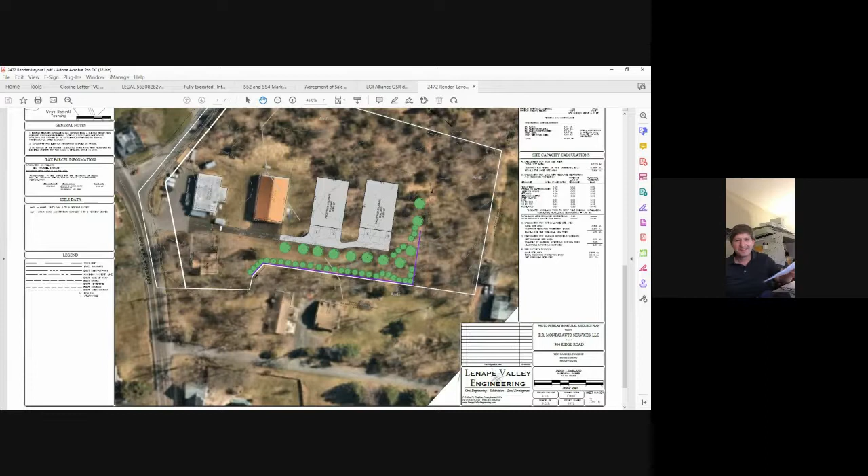Yeah, I realize that. How many of these do you do? Too many, but I make the same mistake every time, so I'm not learning. I was too interested in trying to get my ordinance up. That was the problem.

Yeah, I don't have much to add. They are providing the fence and the arborvitaes, which is in addition to what would be required. Now, it's not along the whole property line, but it is significantly along the part of the property where there's proposed development.

So I guess it would be, just what are the feelings of the planning commission on that extra buffering? Yeah, I mean, I support the effort there for sure.

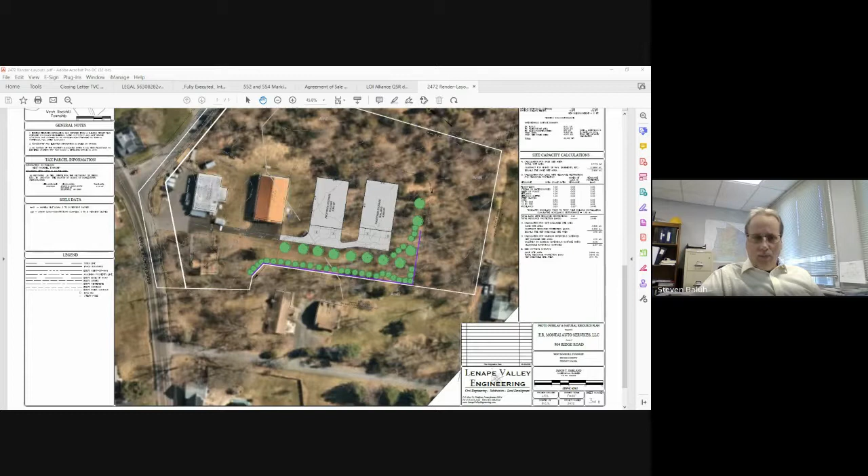And as you can see, it wrapped around the back too. Correct me if I'm wrong, Jason, but the fence will extend partially around the corner. The fence is the blue line on this plan. You can see it now — that's correct, it's kind of a purple line there. It makes a 90-degree bend and goes parallel to the backs of the building. That way, even if you can see through the trees that are remaining, it's still providing some buffering, but not along the property line where the trees already are. It just seemed to make more sense to buffer it closer to the building itself.

Is there any woodland between your fence and the dwelling you're trying to protect there? It's hard to tell from the aerial. There are some scattered trees through there. Okay.

Yeah, we've got a 30-inch maple, 24-inch maple, some kind of 10-inch tree, but they're actually on the neighbor's property, not on our property ourselves.

And that's going to be a white PVC privacy fence, you said? Yeah, that's correct. Have you talked to the neighbors about that? Well, it was what we presented at the zoning hearing board, and I think almost all the neighbors were there. So I'm guessing if they're not here tonight, they probably knew what we were proposing, and it was exactly what we presented at the zoning hearing board.

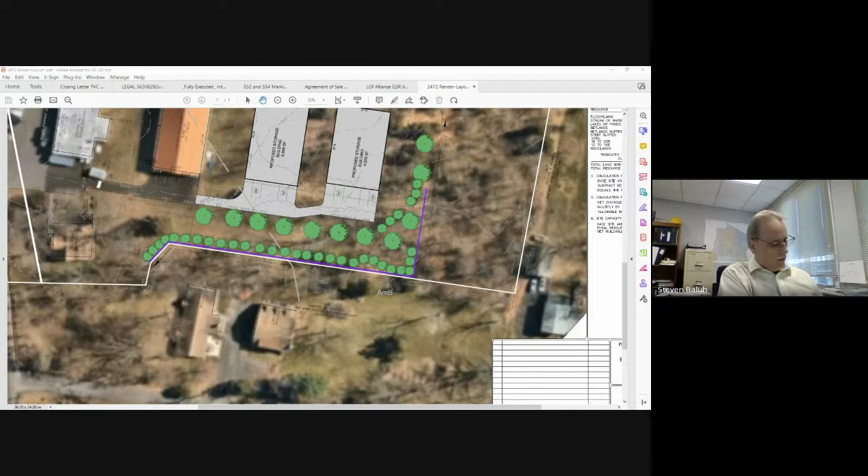Okay, I just went back into the ordinance to double check the type 5 buffer, and that requires a 4 to 6 foot high fence and a landscaped area. So they're providing the fence and providing landscaping in addition to it. So it seems to meet the ordinance requirements.

Any other comments from planning commission members? This is Tim, I'm good with that. Alex, same. John, I'm okay. All right, well, it sounds like we're okay with your buffering efforts. Good.

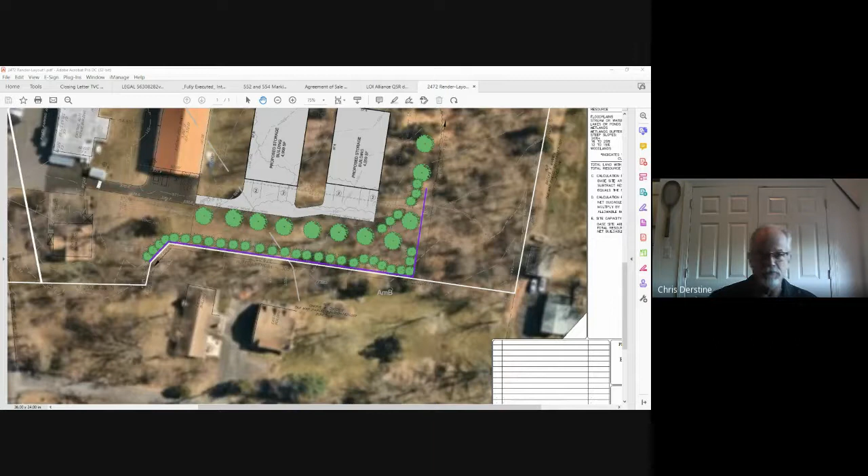Well, we were hoping you would be, and we had kind of talked to you a little bit about it before, so you're consistent, and we were consistent.

That's good. But I think the next thing I want to jump to are the waiver requests, because everything else is a will comply. Anything in there that you want to talk about, we'll have to talk about. But of course, we're requesting the waiver for existing road improvements.

We're also requesting a waiver for street trees. In this particular site, right where the auto shop is and our parking is located, there's really no room for street trees. Additionally, even if there was room, it would be difficult because we need to keep the intersection of Almont open for sight distance, and our driveway accesses. So we're preserving all the trees in the front near the single family home, but not changing anything there, not taking any trees down along the frontage. So we're just requesting a partial waiver. The existing street trees on Almont and Ridge would stay and would meet those requirements.

We're requesting a waiver from a traffic impact study. We put a little bit of information into the narrative, but we're not increasing the number of people using the site. Again, these buildings are storage of cars, not an increase in people working here. Didn't seem to make sense to have any kind of traffic study. We're not proposing any revision to the entrances, and no traffic problems that we know of in this area.

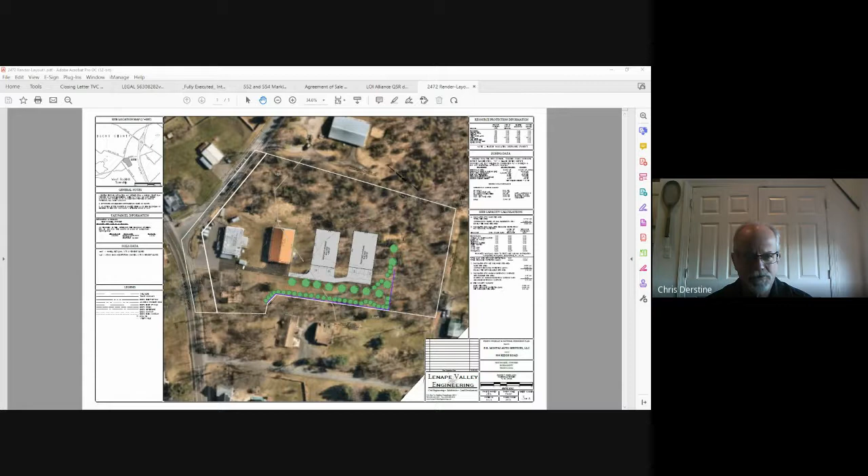Isn't the purpose of these for cooling off of the parking lots? The shade trees? Yeah, that's more for that than buffering, correct? That's correct, they are for that.

We've run into several properties where we couldn't fit all the trees in the parking area for one reason or another. So they're proposing to add them as buffer trees instead of what the extra trees would be required. In a typical parking configuration, rather than putting very strict requirements on parking aisles and islands, you kind of control it with your shade trees.

So what we end up with, if we have a more conventional parking lot with rows of parking, that ends up forcing you to do grass strips in between parking aisles and then islands and peninsulas. In this case, we don't really have those kind of configurations to be able to accomplish it, so it's a little bit different application than your typical parking lot.

All right, any input from the planning commission members? This is John—the only thing I could say is I think if you planted any more trees in the front area, you'd probably wind up cutting them down within five years because they'd just be in the way.

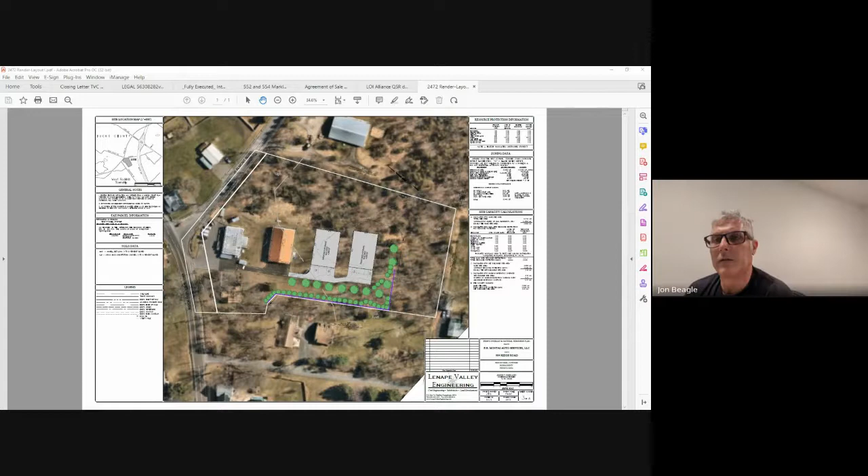Steve, do we have those easements on Ridge Valley Road for that Clay Heckler development? Yes, the original connection over to Lawn Avenue was envisioned to come out through the park property out to Ridge Valley Road. And then we have an easement through the side of those 4 lots that Clay Heckler built, which gets us then just short of Lawn Avenue. So we're almost to Lawn Avenue with our easements already from the park, on that route, on the upper side of the bridge, correct.

Yeah, that goes out to the hospital property, right? Yeah, I believe it backs up to that property of the hospital block. And there's one little missing piece right there at the S curve, to get from the park to Ridge Valley Road.

And this, while it definitely is an alternate, it would require a lot of other offsite easements to make this ultimately work.

I would be more apt for the sidewalk than the trail, realizing that existing houses there make it next to impossible to put a sidewalk on that east side of Ridge Road. But again, this is assuming those houses aren't there. This is for the future.

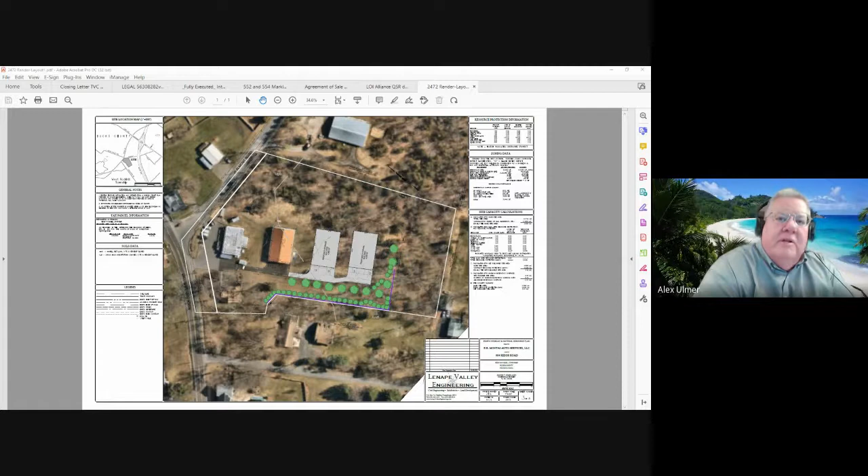Anyone else? This is Alex, I'm fine going either way. I just figured it was something that kind of warranted discussion at this point if we're trying to figure out which way we wanted to go with that. Understood.

To get to Almont Road, we'd need an easement from the western neighbors of this property, correct? Yes, off of... what is that road? Augustine, thank you. Yeah, you'd have to cross Augustine, and then cross there. Then you have to get the other easements for the property owners back there to get back to select properties.

So I don't want to burden Mr. Beagle either, I'm not trying to. That's not my point, it's just future planning is what I was getting at. No, I get it.

And I did have the opportunity while we were talking to find the approval from Kratz. There was no deed restriction placed on the property. There was a contribution in lieu of sidewalk, and I believe we showed the future sidewalk on the plan. My recollection is we wanted to show that so those people buying the lots knew there was the potential for sidewalk. Yeah, I remember going that way. So there wasn't a deed restriction or any escrowed money, but there was fee in lieu of funds contributed to the township.

I remember there was discussion about the deed restriction. I wasn't sure if we actually went through with that, but yeah, we did not. Okay, all right, so where does that put us?

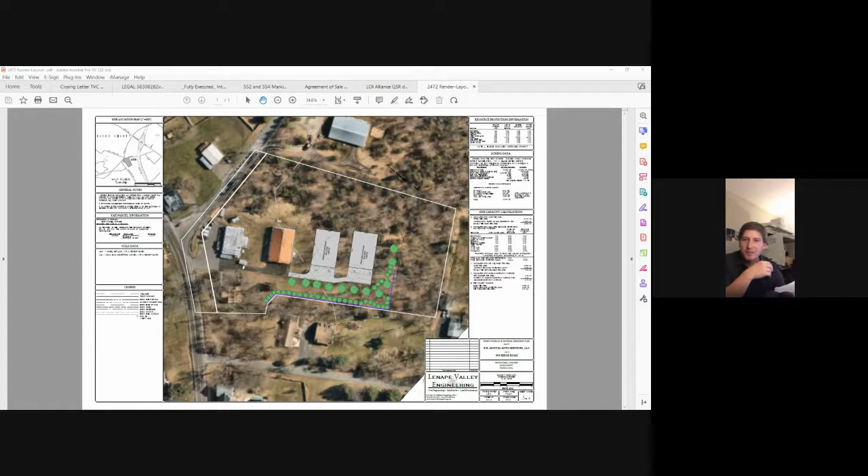Is that correct, Jason? Yeah, that's correct. There's not going to be any kind of work, it's just storage in the back, so no facilities in the buildings. Okay, then you'll need to get either exemption or acknowledgement from DEP that you don't need to do a planning module for the project. Yep, so any kind of approval would be conditioned. I don't anticipate any problems with that for this.

Okay, those were the only other comments that I had in my letter. Everything else is pretty straightforward. So we're looking for conditional preliminary final. That's correct.

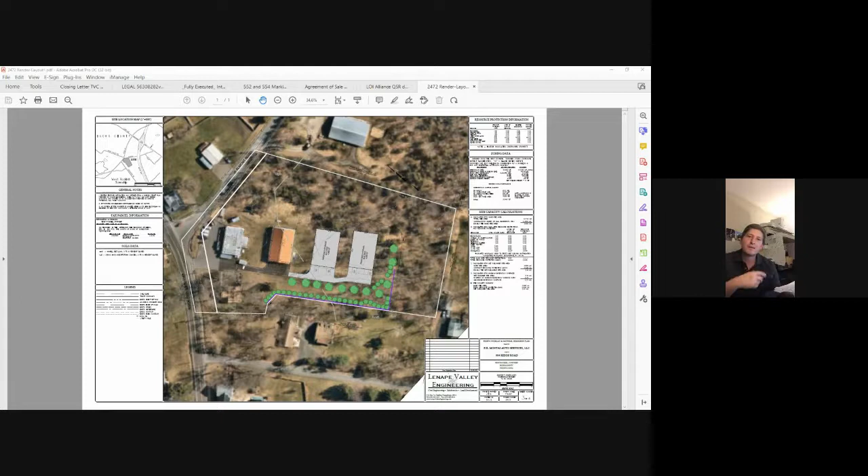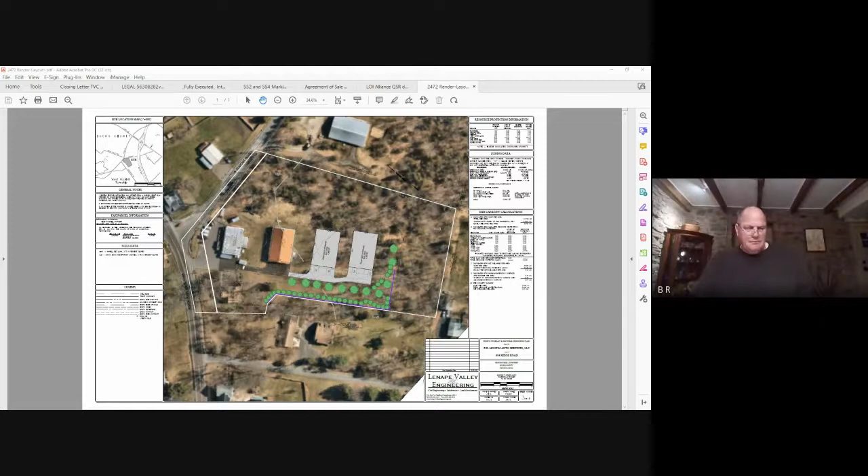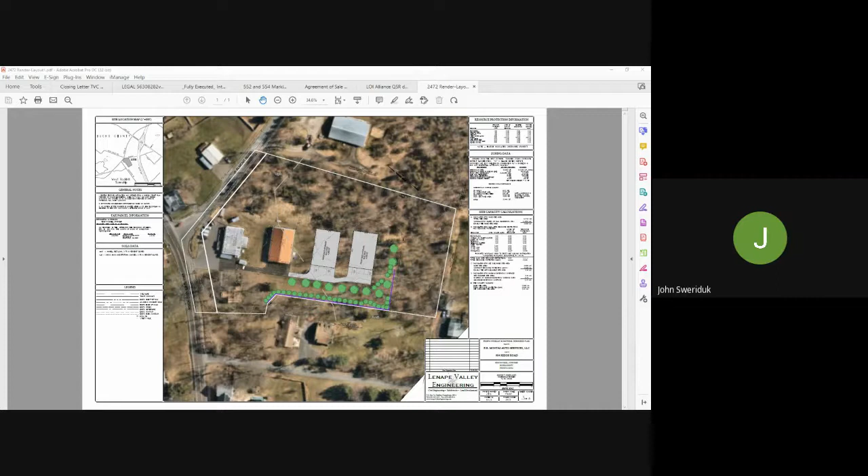All right, Planning Commission members comfortable with giving that? If so, can somebody make a motion? I'll motion for conditional preliminary final approval. This is Tim, I'll second that. Any more discussion? Hearing none, all in favor? Aye, aye, aye, aye. Opposed? Motion carries.

Great, thank you. Okay, Jason and Mr. Beagle, do you want to be on next week's Board of Supervisors meeting? I guess that would be up to Jason. Wednesday, I don't know what Wednesday is offhand. The 20th. The 20th, yeah. You could wait till next month. It doesn't matter, just offer.

He keeps losing his connection. He's back. Sorry, my internet cut out. Can I let you know tomorrow? Yes, you can let us know tomorrow. Okay, just let me know tomorrow. Yeah, and let me know. I'll let you know from tomorrow. Report. Yeah.

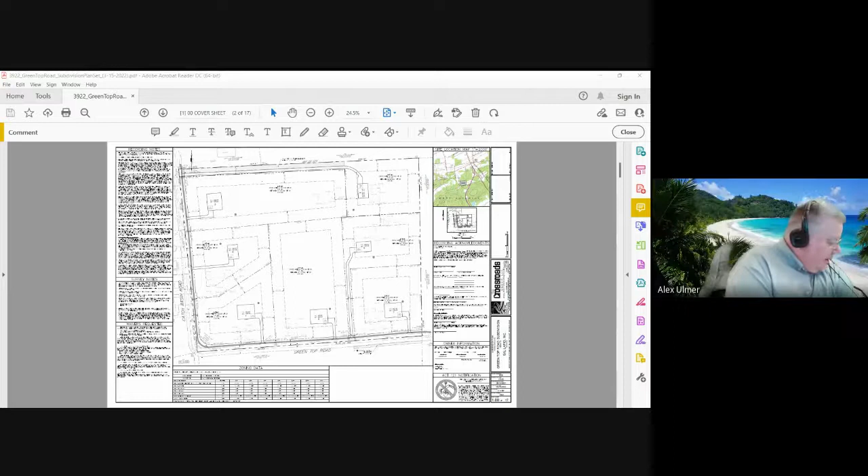Steve, do you have any comment on that? No, I'm fine with the way it's proposed. I think that's pretty much exactly what I was thinking last month. Any other? John, same here. Go ahead, John. Tim? Yeah, I agree. That's what we're talking about.

This is Mike Matzak. Can anybody hear me? Yes. Yes. Okay, now you can. All right, I finally got through. I had to do it through a phone.

All right, if it's okay, I'm going to go. The single biggest point of discussion, I think, is the bike trail / cartway widening. That's comment number 2. So we talked about a couple different things at the March meeting. We did add the trail. We had the road widening, the shoulder widening. We had the trail. However, we added 2-foot shoulder widening and then a 3-foot trail immediately adjacent to it. Now, at one point last month, we had talked about, hey, maybe if there's a road widening and shoulder, then a little break in the trees, and then the trail.

Planning Commission was discussing maintenance. How would that be maintained? So the Planning Commission also discussed a 2-foot wide shoulder and a 5-foot wide trail. So I'm coming to you today and kind of want to circle the wagons on this certainly and make sure we can get a resolution on this. But first, let me make a proposal that if we could maintain the widths that I have on the plan, which is a 2-foot wide shoulder and a 3-foot wide trail, but then pave everything.

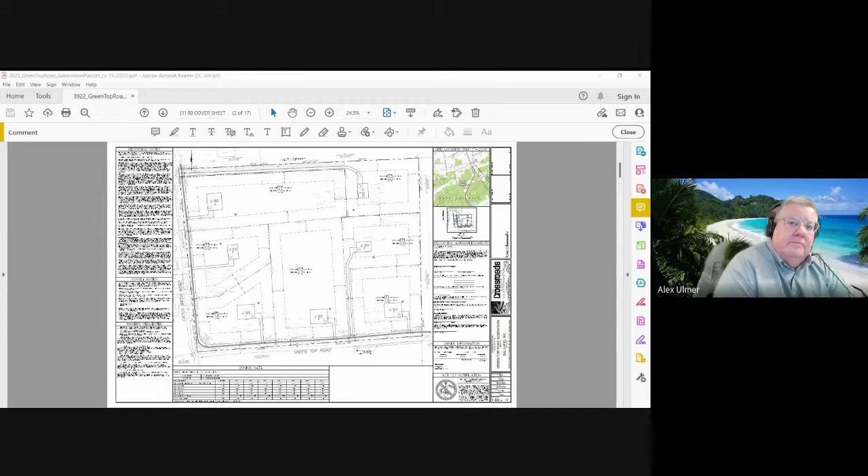Great, thank you. Steve, do you have any thoughts on a continuous shoulder to trail? Well, it's not my first choice, but it's not uncommon to do a quote-unquote bike path like that, where it is connected to the road as opposed to a pedestrian sidewalk, which usually you have the concern of interaction with traffic and wanting to get pedestrians further away from the edge of road.

Engineering wise, you can make either one work. I understand their concern with additional pavement, it's a stormwater issue, but that's not necessarily the township's first concern.

I guess where I wanted to be clear, because I was not at the last meeting, but I have my notes from Kurt that was there, that the township did want it paved, whether it was paved or concrete. I understand, we went the paved route. You wanted a paved surface for this trail along the frontage of the property. Is that correct? We were discussing that as opposed to saying it was a sidewalk along the front there. Right.

And the continuation of the trail from the easement coming down from the Huntsberger property too. Right. Yeah, and they did amend that lot to make that lane wider to have an easement through there, but they're not proposing to construct that easement. And I understand that's again what the township had discussed last time, so that is accommodated.

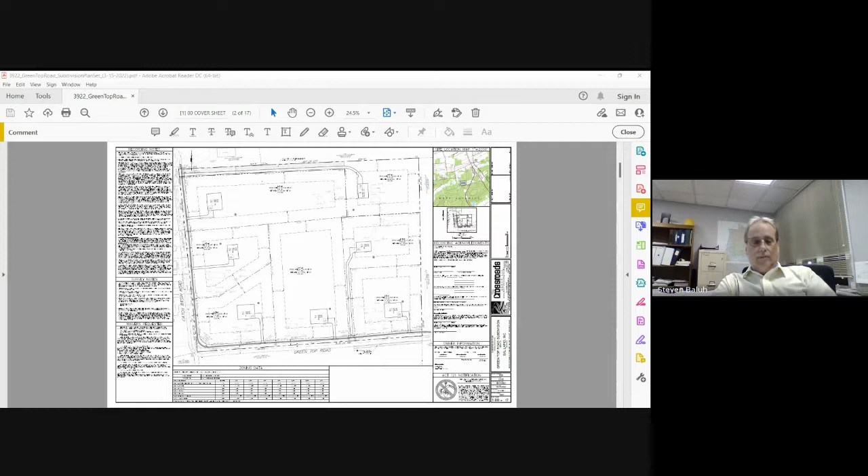How does that affect the road drainage? Does the water run off the road, then onto the path, then off the path into the woods? Correct. Yeah, it all has a similar cross slope off the edge into the woods. Whereas if you have a 2-foot shoulder, the water runs off the road into the 2-foot dirt gap underneath the trail, and then again the trail becomes a maintenance issue. Whereas if it's one solid piece of blacktop, it sheds into the swale that's in front of the properties.

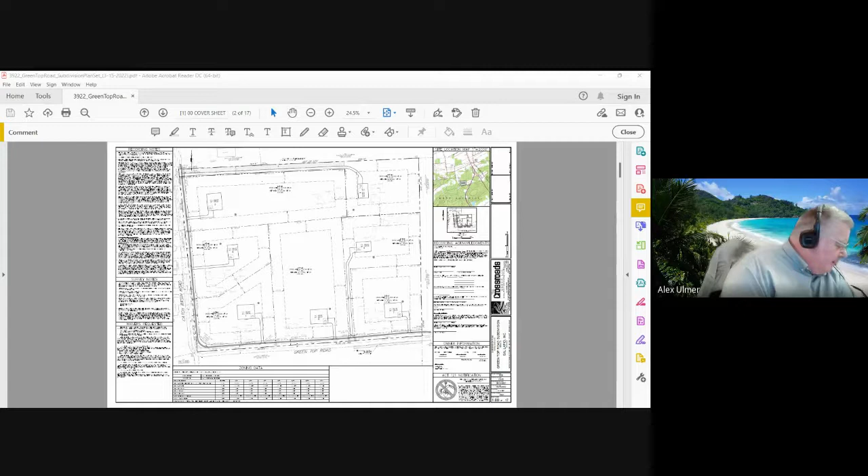So the drainage swale would be beyond the trail at that point? Correct, yeah. And is that the gap basically between the trail and the ultimate right of way? Yeah, in some locations, especially down Catch Basin, we have a swale there. On Greentop, it really sheets into our site, so we have a lot of swales around the houses. A couple culverts we're replacing under Greentop. But it just sheets into lots 1, 5, and 7 across Greentop.

So I don't want to rehash what was discussed last month, but there are a couple different considerations here. If it were a standard improvement in a development, you'd have a widening curb, a 6-foot grass strip, and a sidewalk. We're out in a rural area here, and we had talked about a more informal sort of look to it and a paved path as opposed to that subdivision development look.

So it's partially aesthetics of how it will look, partially a maintenance concern of will it get maintained, is it more likely to be maintained if it's part of the shoulder, and then partially a safety concern. If you're not comfortable with having the path adjacent to the road, then maybe it should be set back the 5 or 6 feet that it would be under a normal road cross section.

That's more along the lines of what I was thinking of and thought we were discussing last month. When we talked last month, it was a 2-foot space from the edge of the road to the start of the cart path. We didn't change that, that I know of.

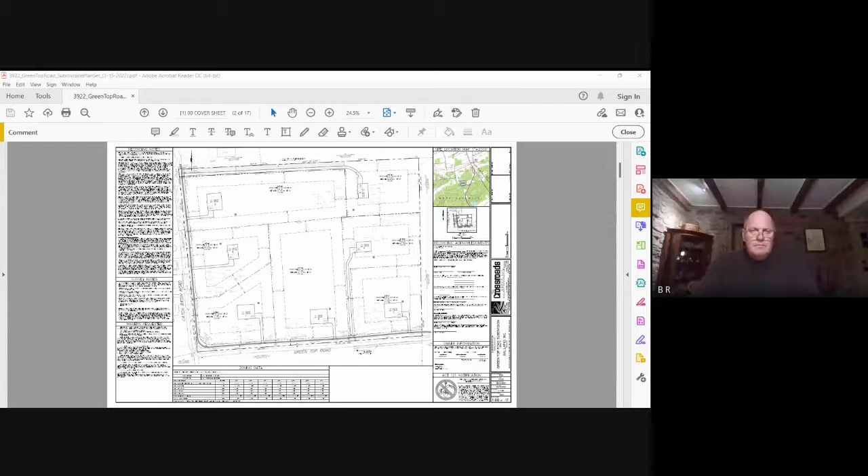John, did you have some thoughts? I think my recollection was what Tim was saying before - a 14-foot wide road, a 2-foot shoulder, some distance of grass separation, then a 5-foot paved walking path. Right, yep, that's what I kind of remember. I agree, that's what I think the discussion last month was.

I'm just trying to weigh the merits of having continuous paving from the maintenance standpoint and the longevity of the trail piece out there. I can certainly see the advantage if you make it essentially a 19-foot wide paved surface from the center of the road to the ultimate edge, and that all that is maintained by the township, just striped off for a bike path. There are advantages to doing it that way, and based on the location, that might be the simplest solution.

Greg, do you see any issues with the township with regard to that? Sure, the difference in maintenance versus the property owners maintaining it versus the township maintaining it and painting it. And then there's always the safety concerns.

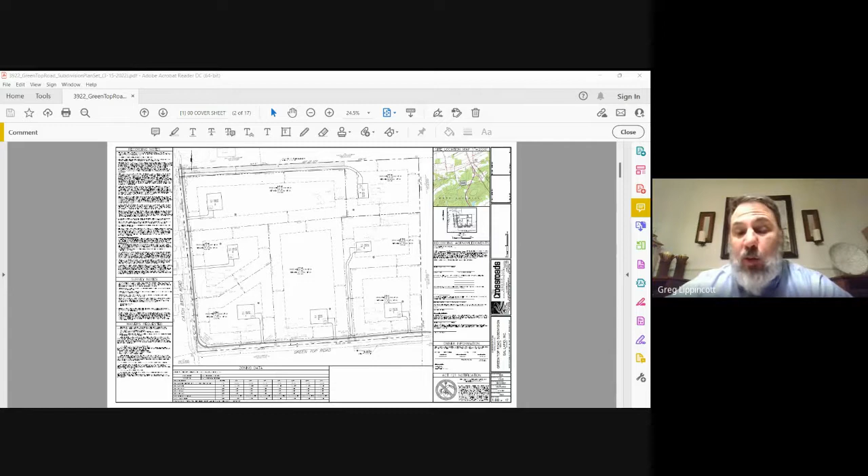Gotcha. And we don't have a situation similar to this elsewhere in the township. I can't think of any. No, we don't have any in West Rockhill.

I just think out here - you're in the middle of the woods, and then you come around this corner and all of a sudden the road's going to open up to 19 feet. You've got this big striping down the right-hand side or left-hand side, depending on which way you're going. I just think aesthetically, for the people that already live there, that's going to be very strange looking - looks like a Center City type setup that doesn't fit. Kind of out of place, yeah.

No, I hear you. Does it also become a deceleration lane for people pulling into their driveways? Exactly, yeah. And then there's safety there - kids not paying attention, riding bikes, whatever. And then you have the opportunity for the car to just drive into that lane.

There's nothing there - that's why I thought we were talking about the curb, a grass strip, and then the path. Oh, we did, you're correct. We talked about a grass strip or even trees, and the trees, I think that was out of the right of way. I think they're going to bust up the paving on both sides. We talked about that, but yeah.

Well, I don't care if we do a 2-foot shoulder and a 5-foot path, but I thought we were always talking about the 14-foot cartway, a 2-foot piece of grass, and then a 5-foot cart path. And if you want to do it that way, that's fine. That's not what I was thinking.

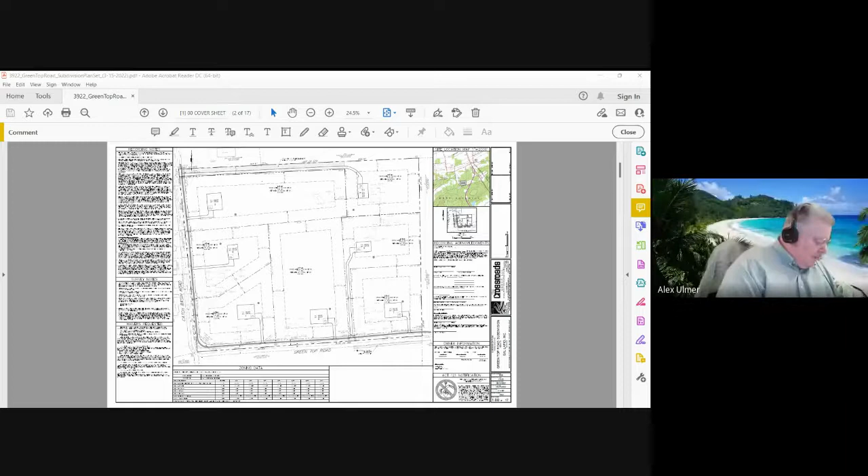So you have 4 to 6 feet of grass strip, plenty of room that keeps everything within the right of way. Gotcha. I would be more comfortable with something like that, both from the standpoint of safety as well as aesthetics, considering the area that it's in.

I think especially the safety piece, because I think it's going to become, you're right, it may not be wonderfully grassed, but it's not going to be paved, and it's going to be a visual deterrent to someone driving up onto that trail. Yeah, some kind of demarcation between the two. Like, you know what I mean? Like, there's got to be something there. And I think the more distance you have there, the better off you'd be.

I'm also thinking about that intersection where now you've got an opportunity for somebody even to cut the corner shorter. Right, yeah, somebody's walking on the trail and they cut the corner short. Yep.

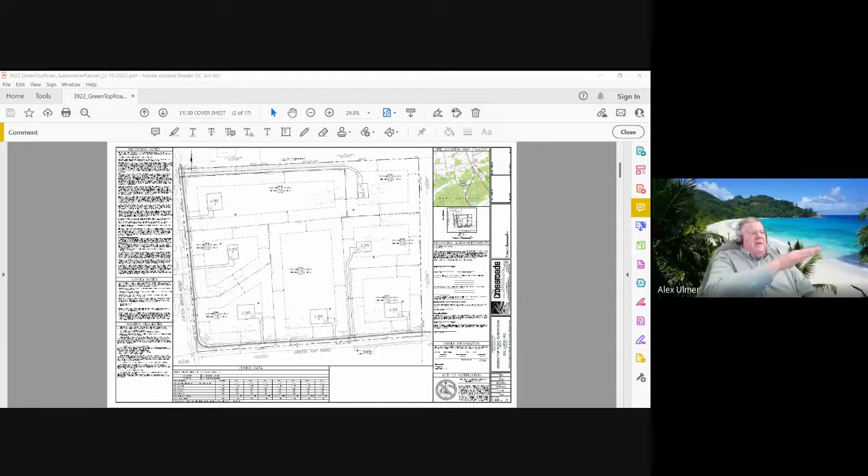So that's, I'm just thinking about drainage now. You're going to come from basically the center line of the road, and it's still just going to pitch all the way across there. The only difference might be you'd have the asphalt of the trail come up a little bit, so it'd pretty much be even with the grass. I think we can make that work. Without getting into curb and controlling all the runoff from the street, that's a whole other dimension to this. I don't see a major problem with it sheet flowing across, as long as it's graded properly.

What if we did a 4-foot shoulder and a 4-foot path? 4-foot sidewalk, normal required sidewalk's 4 foot, right? Yeah. But are you still talking paved? Yes, yes. I'm just saying, usually I don't know if you can find a 4-foot paver to do that. Well, it's not going to be easy, but we'll figure it out somehow, use a skid steer or something like that. No, I understand, it's just by default you usually end up talking about 5 foot when you're paving it. But he is correct, 4 foot is the standard sidewalk width.

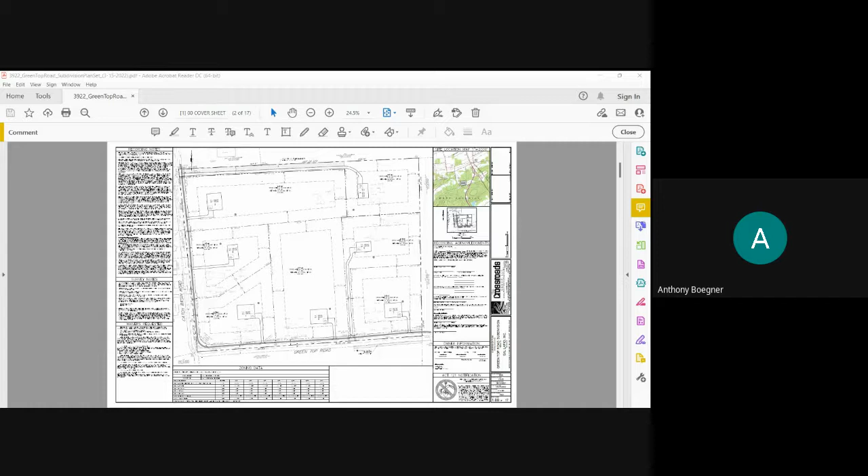Is there curbing? No, there's no curbing out here. And we don't really want, from stormwater management, I don't really want curbing out here. I don't think it meets the aesthetic of the neighborhood. Everything sheets into the site. Like I said, it comes from a roadside swale and catch basin, which we're going to extend as part of this design.

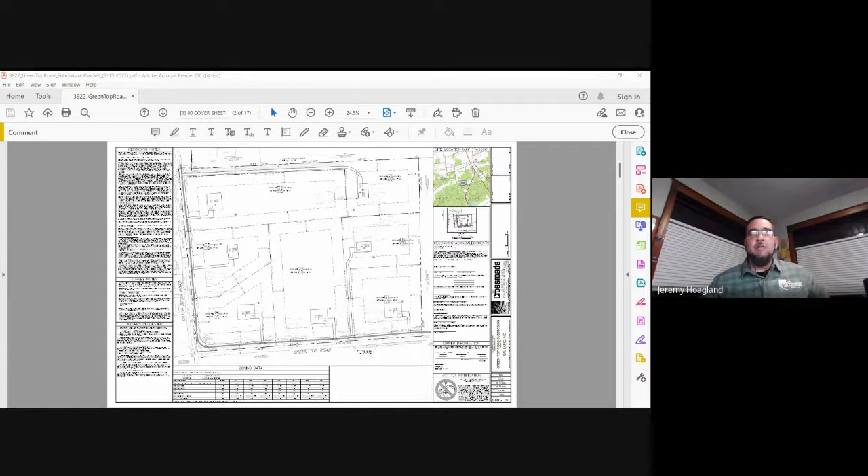Alrighty, if we beat that one up enough, let's go on to what else is left here. Are we all good? Is it okay for me to assume we're good? So I'll make that last revision to the plan: 14, 4, and 4. You got it. Thank you. Thank you.

And I won't hold it against you, Mike, or Jeremy, if you end up building 5 feet in the end anyway. Well, what my biggest concern is just the amount of trees that we have to take down, and then how far we're pushing onto the property. Yeah, understood, I mean that's the biggest thing.

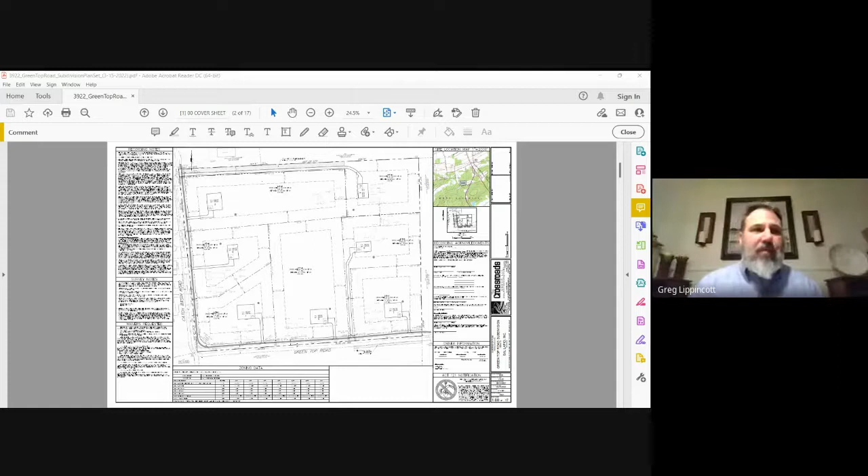Did you have anything else to think on, Jeremy? Sorry, say that again, Steve. Did you have other items on this? I have a couple quick waiver requests. I did want to ask about your comment number 5. Excuse me, comment number 5, we need to get the fire marshal's comments back. I did not see them. I don't know if you, Mr. Lippincott, got anything back. I'll take a look. Okay. Yeah, I know we sent it to him again, but I don't recall.

I get that they're busy. It's usually the lingering item for us to get those in right before recording. So if we could get it, that would be one thing we have to handle.

Everything else will comply. Some of the outside agency approvals, we're in process with our NPDES permit. The modules are in process. I think everything is working. We're very close to the end as far as hard design here. We're down to chasing permits.

So the last thing for the township, I do have 4 waiver requests. We discussed these at length. There was more last month, and we kind of whittled them down. So if I can just refer to, I don't know if you have my waiver request letter in front of you. Yes, we do. March 15th.

March 15th, yeah. So street improvements, it's a partial waiver request to pretty much do what we're proposing to do on the plan. I'll update this waiver request letter to reflect our discussion on the 4-foot grass strip and the 4-foot bike trail. So the only waiver really is curb. It's really curbing. Yeah. Yep.

The next 3 waivers are all in the stormwater ordinance. So the first one is BMP plantings. There are planting requirements from the township perspective. There are also planting requirements from DEP's perspective. We're trying to use DEP's plantings for the BMPs to take transpiration credits because we don't have groundwater. We don't have good groundwater infiltration rates here.

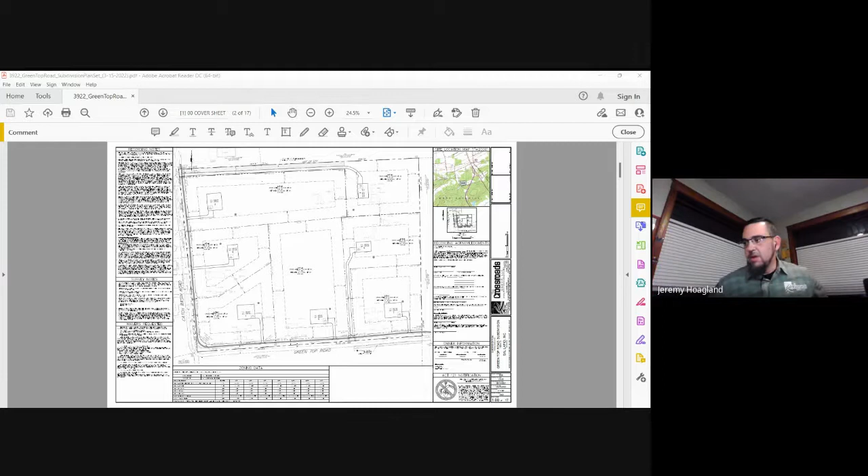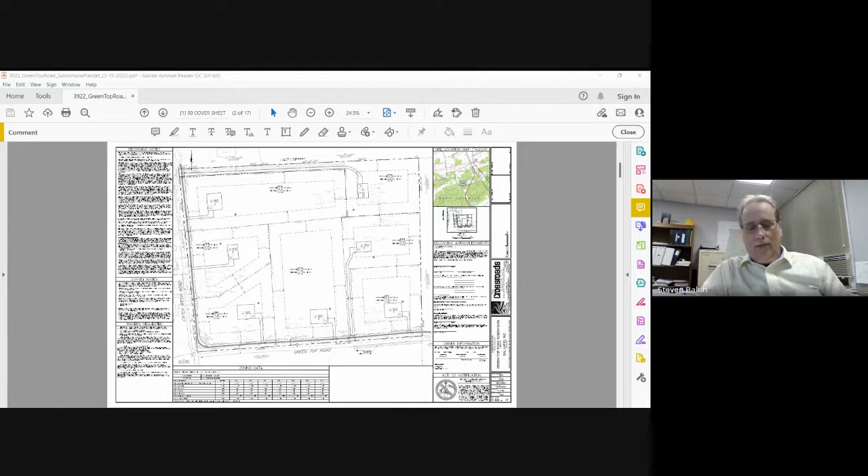At the time, and Steve, if you want to weigh in, your other compatriot, I forget the name. Don't want to put his words in your mouth, but it's not a lot of storm sewer on the internal of the site. No, and the township has always required RCP in public rights of way, but on privately owned lots, we have on other projects allowed HDPE.

And you okay with the 15-inch sizing? Yeah. Okay. The 15-inch size is the last waiver request. Can we use that in certain areas? Yeah, you have the design calculations to support that. I'm fine. We use 18 mostly for maintenance, it just clogs less and easier to open up if we need to. So if this is privately owned pipe, that's no longer our concern.

Steve, one question on the landscape planting buffers. Are those typically intended for larger basins? These almost seem like they're more like rain gardens. Yeah, our ordinance now doesn't differentiate. So yes, they were originally developed for larger basins, but lacking any other standard, we apply them to any basin. So yeah, they are smaller, with scale appropriate plantings around the basin, and then it's wooded around the outside of it, around the perimeter. Yeah.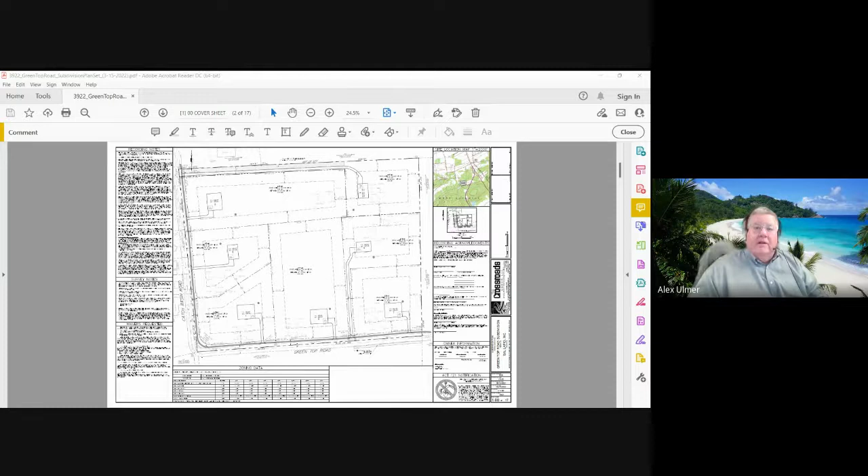Do we need to wait for a revised waiver request? What's revised? Oh, because you're still waiving curb. Right, and then there wouldn't be anything else there, so it'd just be for the curb waiver request. It really doesn't matter about the 5 foot that's in the letter. Yeah, you're not waiving it, so I don't see that as a problem. Okay, he could correct it if he wants to later, but I'll correct it for the board, and I agree. It's just the curbing, a partial waiver request. Yeah, I think we're looking for a motion on the waiver request at this point.

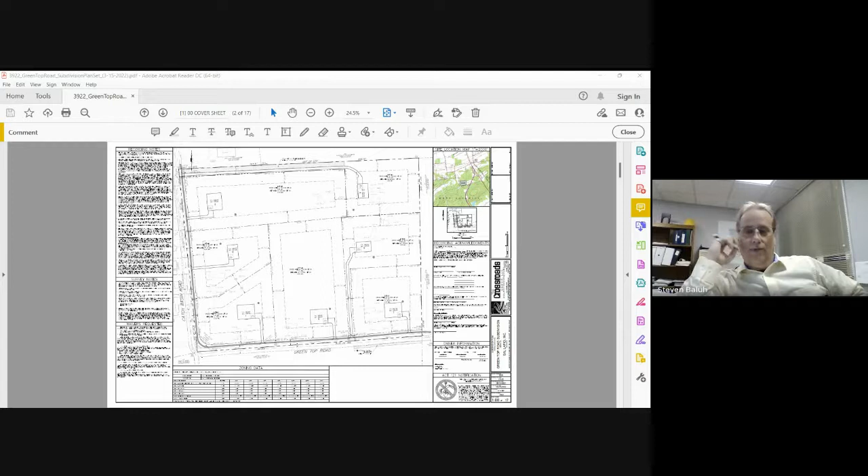Are we waiting on a revised plan to come back to show the shoulder? Well, I'd like to ask for the waiver request, certainly if we could have action on that, but also ask for preliminary conditional approval based on what we discussed here. There isn't much else to do with the plan. It's the planning commission, so if they're asking just for preliminary approval because they still need to get planning modules and things, you will see it as a final plan, so you'll see all those final changes on it. Okay, if you're comfortable with that approach.

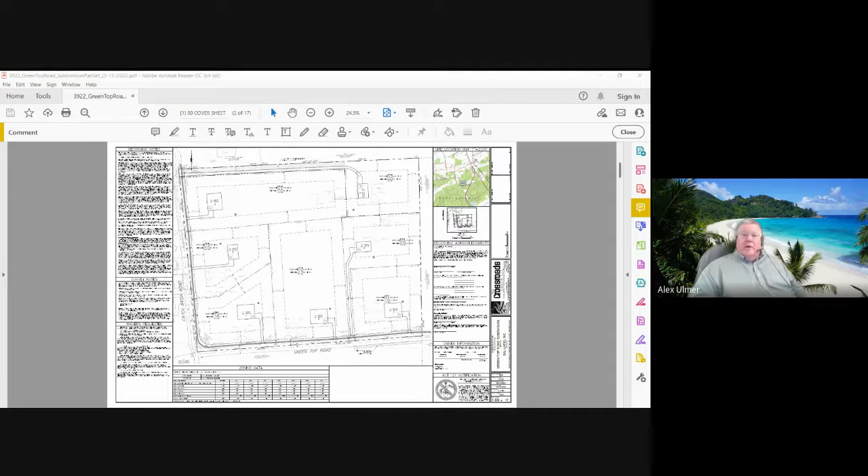So what do we need, a motion for the waivers at this point? I'll make said motion. John, I'll second it. All in favor? Aye. Opposed? Motion passes.

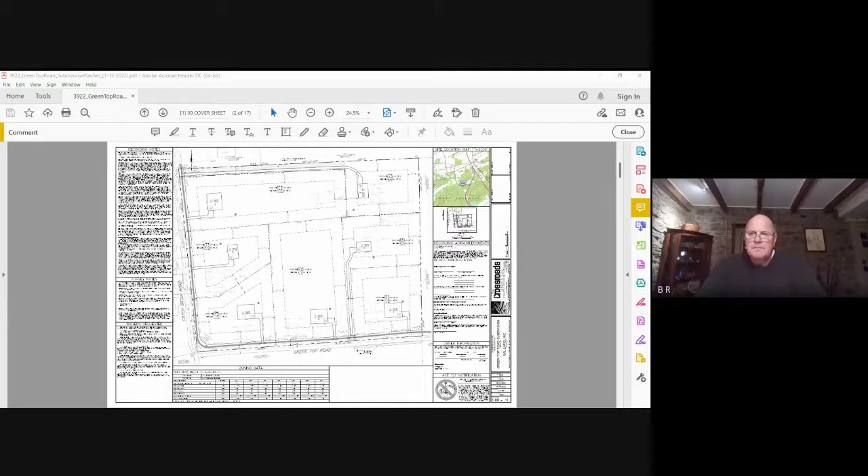Okay, that'd be it. I think that gets us to the point where we're good until they get their outside agency approvals and we get that revised plan with the 14.4 and 4. We'll get working on that. Thank you very much.

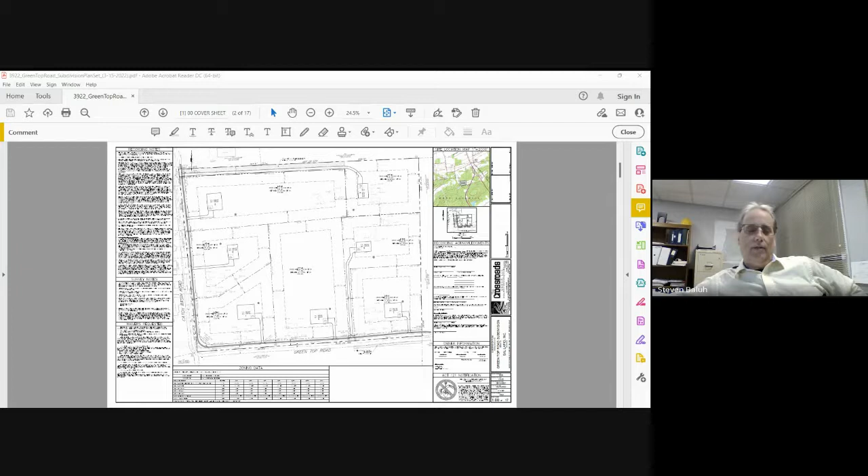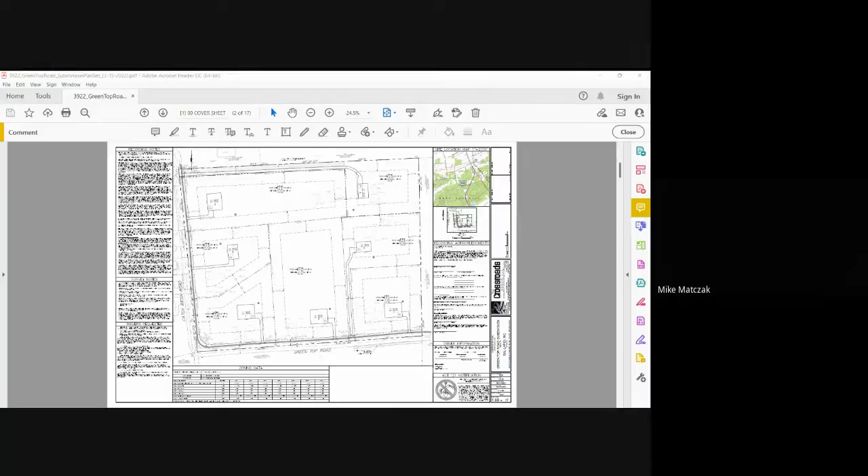Thank you, guys. Make the same offer to you if you want to be on the Board of Supervisors meeting next Wednesday. Let me talk to Mike and I'll get the answer back to Greg. I have, I think, 2 meetings on Wednesday, so let me see if they're not all Zoom. I used to be able to do that, but let me see, not a problem. We're not forcing you, I'm just offering. Clone yourself. Thank you, everybody, thanks for your time. Thank you, guys, I appreciate it. Thanks, Mike. Thank you. Bye, guys. All right, take care. Yeah, bye.